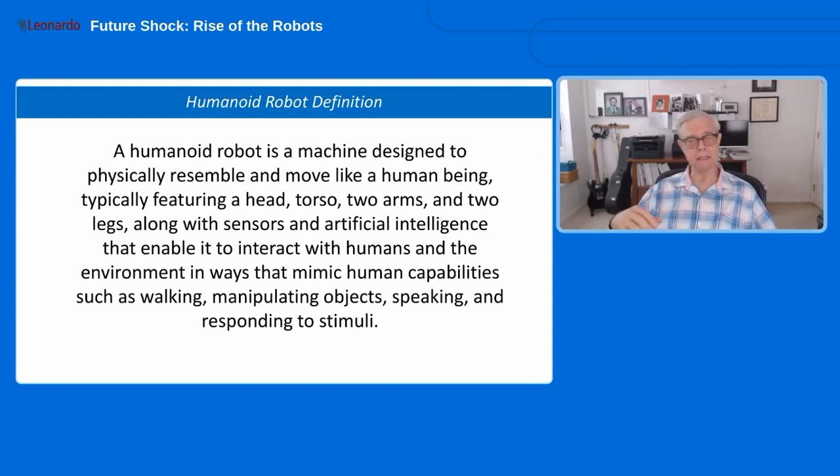Now, why is this important? Well, because at least for the time being, our world, our developed world that we live in, is geared or designed for humans, for us. So if we have a humanoid robot that can emulate those kinds of actions and tools, they'll fit right in, right?

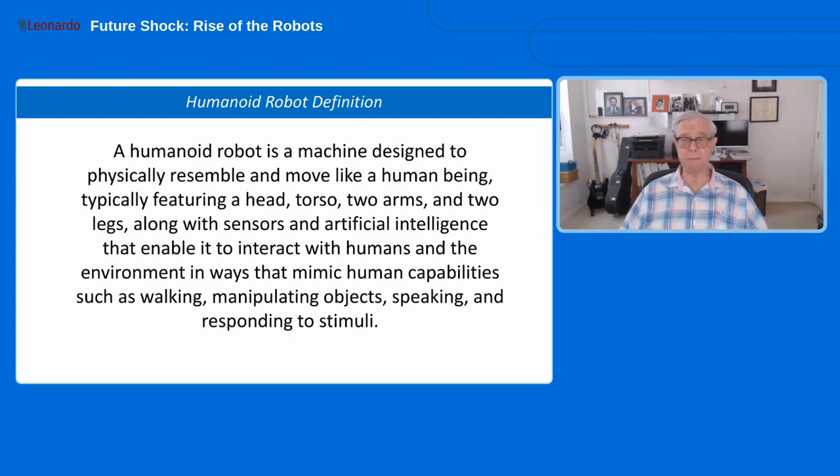They'll be able to fit right into our chairs and seats, use our keyboards, piano keyboards, cars, tools, and everything we currently use, quite seamlessly, assuming they're able to do that. So that's what we're talking about here: the rise of humanoid robots.

Here's a quote I came across a few days ago, from Dr. Pero Mićić - I'm not sure how to pronounce his last name, I think it's Serbian, but he's in Germany. He's a professor, and I kind of like what I've seen so far on YouTube. In addition to his teaching responsibilities, he runs a group called the Future Management Group.

This group was formed, or is being spearheaded by him, to help people like ourselves make this transition to the world of humanoid robots. What he's calling humanoid robots is potentially the biggest technology innovation and disruption in human history, much more than the car, much more than electricity, much more than a lot of things.

Hugely disruptive. The iPhone was introduced in 2007, so that wasn't that long ago, and now it's just like, who has a landline anymore? It's pretty much taken over, and in relatively short time.

So the question is this: is this what's coming, yes or no? And if we say yes, probably, then how do we prepare for this? And how does this impact our world of lean manufacturing? So what we're looking at, what's coming down the road, is this.

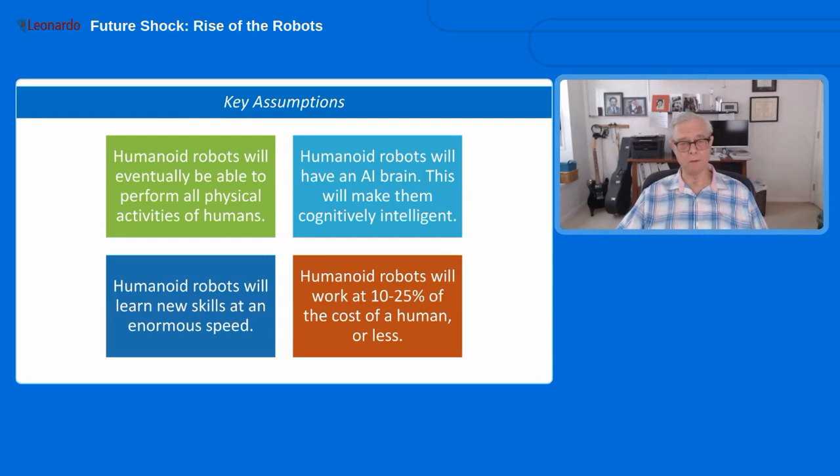I've seen some reports projecting that humanoid robots will be much less than 25% of the cost of a human, starting with, say, $10 an hour equivalent for a humanoid robot, down to $1 an hour, maybe even less than that. So who knows, we'll see. But in any case, the projection is way cheaper than humans in terms of pure cost. And that's why companies will not be able to not do this, once they become available.

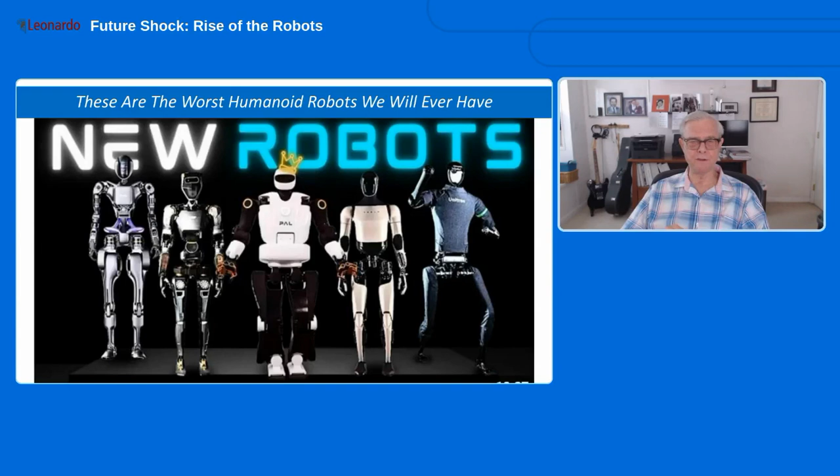Now, this isn't just pie in the sky. These robots are actually being developed. In the United States, I recall reading something like 25 companies are actively involved in creating humanoid-style robots, sometimes with different target markets like manufacturing, multi-purpose general purpose, or domestic use, etc. In this picture, there's one - the second one from the right is the Tesla robot. Not sure about the others, but there are a lot of them coming online. If you're curious and want to explore this, all you have to do is go to YouTube and search 'show me humanoid robots,' and you're going to get more information than you can deal with. You could spend all day learning about this stuff. So this is very, very active, and not just here in the United States.

Here's the other thing that's going on, which is really quite incredible. China, the government of China, has announced that the humanoid robot market is a key target, a key goal for the country to dominate - the humanoid, general purpose robotics market. And the plan, roughly speaking, from what we've learned, is that by next year, 2025, the goal is to have some of these robots in mass production. So remember, we talked about the cost curve.

That will start taking place for some of these robots. They already have some simple ones that are probably not good for much, but they're being sold for something like $16,000, humanoid robots. But you're going to see the cost of these come down dramatically if they're in mass production. Their goal as a national strategy in China would be to dominate that market, whatever that means, from a cost and capability perspective, by 2027.

So that's 3 years from now? This isn't 2030 or 2040 or 2050. This is a few years from now.

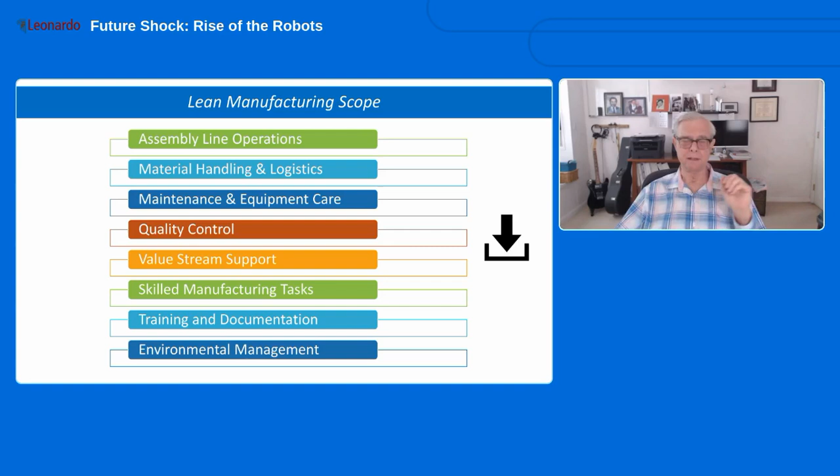Right, so let's go through these eight ways that humanoid robots will or could impact our world of lean manufacturing, one by one. The first one is assembly line operation.

So this is pretty obvious, I think, expected. What we're talking about here is robots able to replace human assemblers or workers in a factory, doing assembly of components, and also as part of that same process, doing quality checks or inspections. The idea of having an external quality inspector is really not necessary anymore. The AI could be doing the work, and workmanship quality seems to be pretty much a given, unless the robot malfunctions in some way. But there are other quality concerns outside the workmanship area that could be built into the work as it's being done—bringing quality to the source, to the point where the work is actually being done. That can be done.

Now, the third point here is flexible adaptation to different product variants. This is kind of our wheelhouse at Leonardo Group, my company—mixed model manufacturing. In theory, these bots could be trained on every different model coming down the same assembly line, so the transition from one model or product variant to another would be zero, and they could handle a lot of variation on the same assembly line without missing a beat.

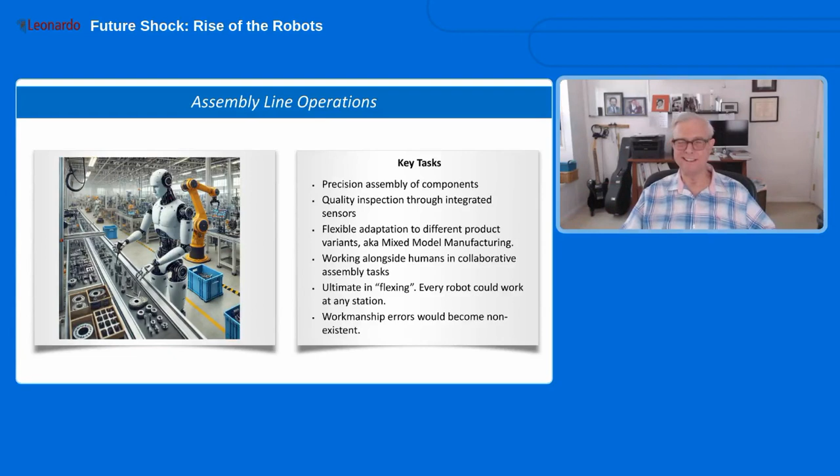So that's a change. The next major task for robots, again not a surprise, is that they would do material handling and logistics. This is already happening today to a certain extent—Amazon has robotic help in the factories—but if we have a multi-purpose, general purpose humanoid robot, they can be trained to do anything a human does today, including driving fork trucks, moving things around, doing physical inventories. So a lot of the basic functions of material handling: raw material transportation to workstations, warehouse management, picking, packing, loading, unloading trucks, opening containers and putting parts away.

Now, this is an important one: kitting operations for assembly lines. One thing that's clear—I've seen it in action at Toyota—is that if you can efficiently create a kit and present it to an operator, a kit meaning a set of parts, as opposed to a Kanban situation where you've got bins in front of the operator and the operator picks the parts required.

If you can give them a set of parts, then probably your error rate in terms of part selection is going to be lower, because you're giving them the right parts that they need, if it was kitted correctly. And you're reducing the time required to select parts, which could be a small percentage of the cycle time, or it could be a really big percentage of the total cycle time or takt time.

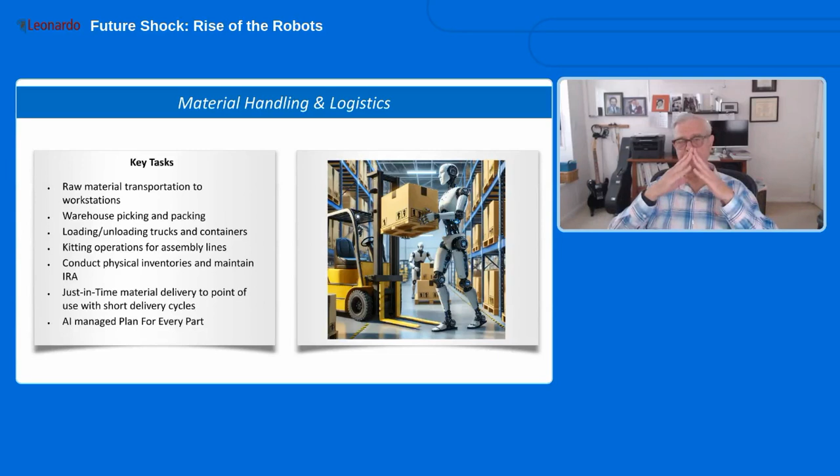But China has the biggest problem because they had the one-child policy for so long. The forecast is that China's population, currently around 1.4 billion, will decline by hundreds of millions of people within the next 50 years, because that population curve, normally a pyramid with younger people at the bottom, is inversed. You have older people at the top and fewer younger people coming up through the age ranks. China has that as a serious problem.

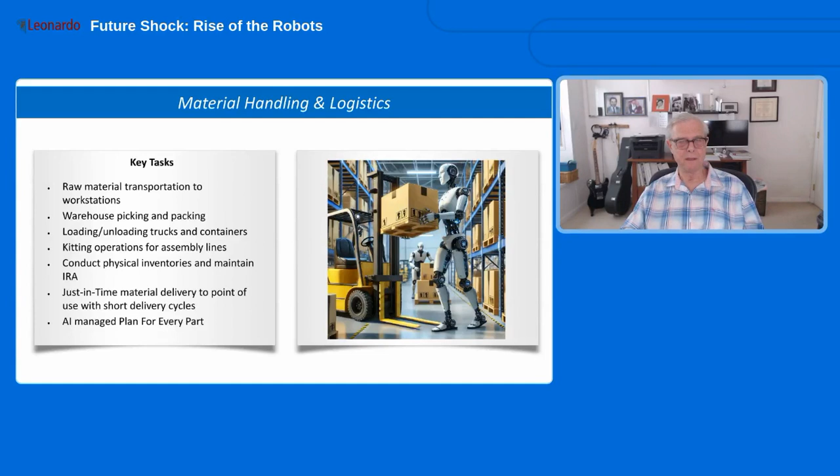Next, maintenance and equipment care. So maintenance of machinery, assuming we still have manufacturing equipment: routine inspections, checks, and adjustments. Remember, we're talking about a humanoid robot that can physically do anything a human can do and is as smart or smarter. So certainly they can do routine equipment maintenance checks and adjustments, that should be a no-brainer, and probably even basic repairs and part replacements.

But more complex maintenance, for some extended time, humans would need to be involved with. Eventually though, why couldn't an AI general intelligence humanoid robot do that as well? No reason they couldn't. Basic cleaning and sanitization could be done robotically, no problem. Managing tool cribs, organizing, maintaining, and sharpening tools, all those things can certainly be done.

There's another interesting thing regarding maintenance. You've probably heard that machine learning has allowed systems to monitor equipment for vibration, using sensors that monitor vibration and even the sound or pitch of the machine operating. Through machine learning it can detect when something changes. That change may be tool wear, the tool starting to wear out, the sound is different, we learned that through machine learning by analyzing a ton of data, and therefore some maintenance action may be called for. Or it could be more subtle, maybe a bearing starting to go out.

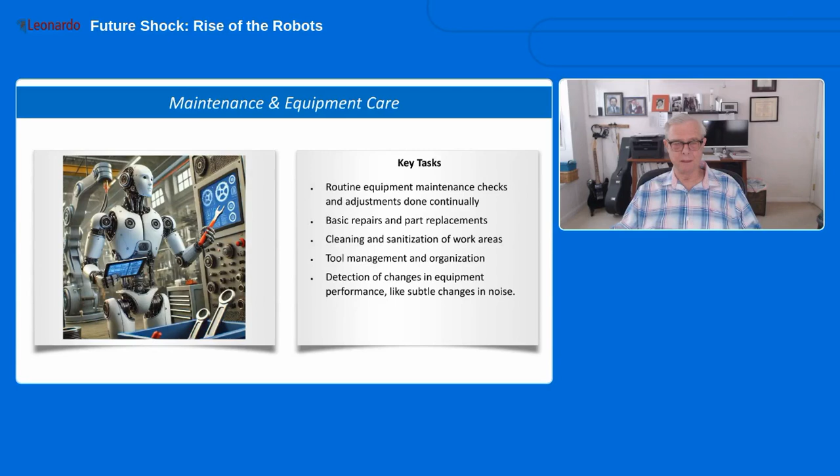And we're detecting this way ahead of time, so we're not waiting for that bearing to fail. We're detecting these changes and can do predictive maintenance, basically, that's the term they use. We're predicting the changes. Certainly robots that are smart enough and have these sensors built in could be performing those kinds of checks without needing extra sensors. They have the sensors built in and can do that. Who knows, so we have good opportunities there. Quality control.

So a lot of quality issues, especially workmanship issues, should be going away because the robots are doing standard work, and that work has been vetted, and they're doing it the right way, and they can actually be checking their own work at the same time. So a lot of quality issues we have today, but not everything is going to go away.

We could be building into the humanoid robots, because they have cameras, the ability to do inspection of their own work, certainly, and we may even allow them the capability of doing physical testing if that's required, as the work is being done, because clearly the point at which the defect could occur is the point where you want to do the test, and not let it go down the line.

So that kind of thing could be built into the quote unquote standard work that a robot is doing. Defect detection, sorting, real-time quality data collection could be happening at the same time.

Check-Do-Check is a term that we use to try to improve workmanship quality. The idea here is that when you do work and there's a possibility of doing it wrong, in other words the work itself is not error-proofed, you can do it wrong. If you got distracted, you're tired, you could do that work step wrong, then it's not enough to just do the work and move it down to the next station.

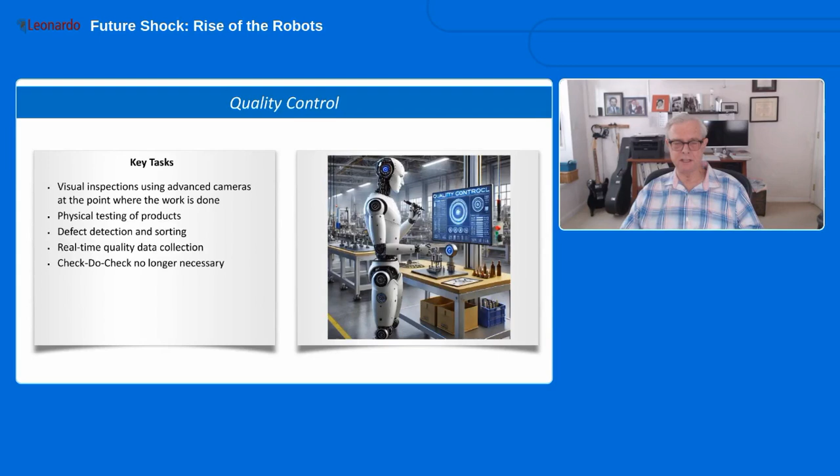But if we do have to have additional tests or things that are not detectable, then that could be built into the work as well and not allow things to get down the line and further value added. Next thing, value stream support activities.

Okay, what could humanoid robots do for us here? Well, 5S implementation, monitoring, maintaining 5S, certainly. That's kind of the factory equivalent of housekeepers for us in a home. So that's something. Visual management board updates.

So if we have a combination of humans and humanoid robots, that's something, a service that they could provide, maintaining our management boards, maintaining KPIs, for example, keeping track of that, keeping track of progress charts, etc. If we have safety concerns that need to be monitored and identified, that's a function that a humanoid robot could provide.

Remember, back to your question, Jonathan, under what circumstances do we need humanoid robots? Well, we may not, quote unquote, need them, but if they're 1/10 the cost, then companies are going to be forced to use them, as opposed to paying someone to do something that you could have a robot do for 1/10 of the cost. That's a big part of it. But in general, and we'll talk about the differences between humans and humanoid robots, they're probably going to do those tasks better. So not just cheaper, but better than humans could do it.

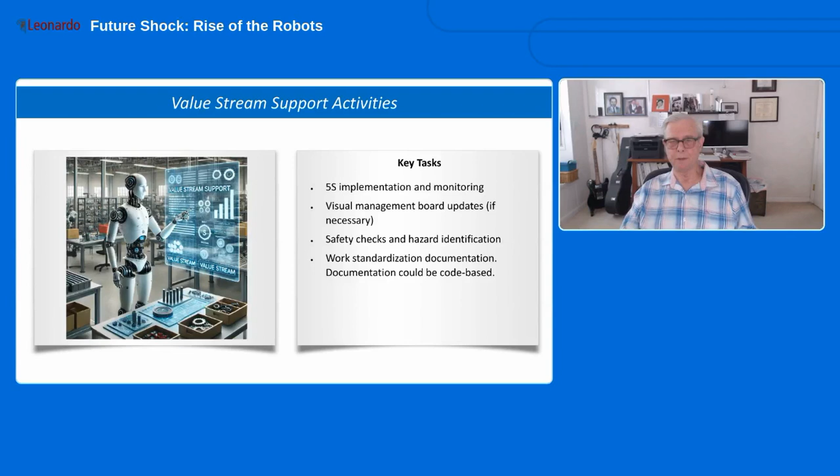Work standardization documentation. So I'm saying in the future, if the documentation is for robotic use, for humanoid robot use, that documentation could be, instead of text-based, it could be code-based, and easily transferable from one humanoid robot to another or to the whole team. So lots of good help that we can get there.

Now, here's something that's going to start digging into tasks that people think maybe are robot safe, and those are skilled manufacturing tasks. And probably for the time being, that's going to be true. There are certain tasks that robots today simply cannot do. Humans have to do them. So we have tasks like welding and joining operations.

That's a nice image. By the way, I hope you're enjoying these images. They're all generated by ChatGPT, DALL-E.

Welding and joining, finishing, painting, complex assembly that requires a lot of dexterity or fine motor skill, monitoring and operating complex machinery. These are tasks that require a lot of training and practice to really get good at. And once you've trained a robot how to do that correctly, that skill can be deployed across other robots basically in zero time. So we have those kinds of tasks that, at least in the longer term, should be able to be done by humanoid robots. Why not?

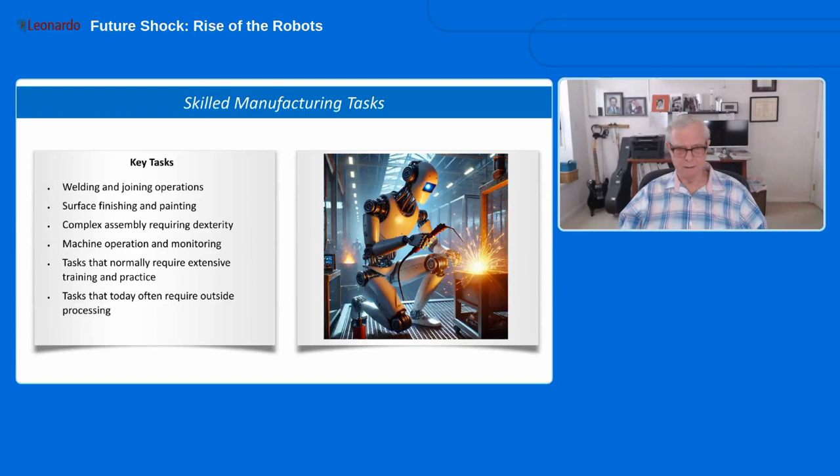And John says, why humanoid? Because most of the tools, equipment, vehicles, machines, everything that we use in the world today is designed for humans. So humanoid robots will be able to fit right in, use the same tools we're using, operate the same machinery, drive the same cars. Longer term, there's no reason why they have to be humanoid, but there's a big advantage if we can get these smart humanoid robots working with the stuff that we already have.

Training and documentation. If you're a lean specialist, this is a big part of what you presumably do, working with teams of people, training, coaching. AI robots, if they're needed to do that, can start taking over some of those jobs, like demonstration of standard work procedures and creating work instructions for humans. AI can already do a big part of that.

There's a company I should mention called Retrocausal. They have some products available. One is called Assembly Copilot, the other is called Kaizen Copilot, that does some of these things. In other words, it's not a humanoid robot, but it'll observe work and document that work and get trained in doing that work, and then be able to coach and train human beings to do that work and actually monitor their work, so that if someone does something out of step, out of sequence, or selects the wrong part, they'll get an alert saying, hey, you picked the wrong part, or you're doing something out of sequence, those kinds of things. These tools are quite remarkable, so I invite you to check it out - Retrocausal.ai - go to their website and see what they have to offer.

It's pretty amazing, so a lot of this stuff is already happening, but not in the form of a humanoid robot. Robots could also be doing things like Gemba walks in terms of training and documentation, do things like value stream mapping. If they're as intelligent or more intelligent than a human, and they have vision capabilities and the ability to walk around, they should be able to do a lot of this work themselves without requiring humans.

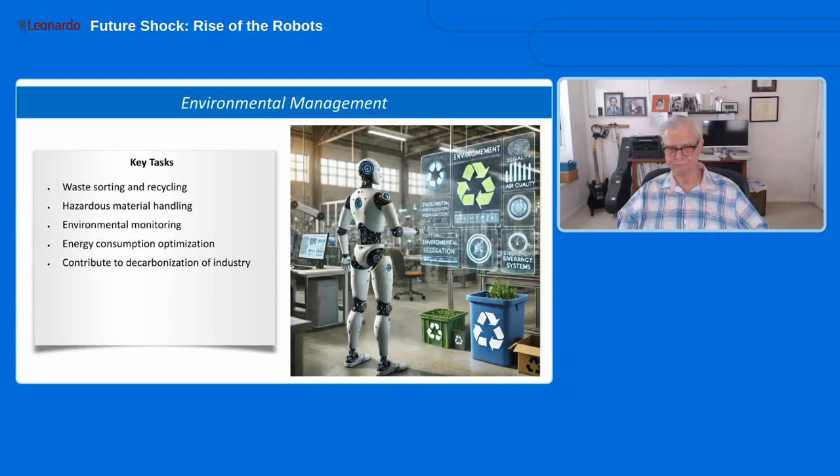So that's it. Any other comments here?

So one thing you can do if you want to assess the potential future impact, just out of curiosity, of robots on your work or your company or your area, is do a simple matrix and list some of the processes that are done physically by human beings. If it's non-physical, then AI is going to be able to come in much sooner than a humanoid robot and take over some of those jobs. So basically, any work you can do sitting at a computer, typing, or interacting on the internet, that kind of work is really at risk.

If not now, then very soon. But physical processes that require agency, where physical things are being moved around, do a simple list of those. Then based on what you heard today, and maybe some research you do on the internet or YouTube, which is kind of my source of learning about some of this stuff, you could project out.

Maybe today it's zero or very limited opportunity for automation with robots. But if we go out - boy, this is pretty far out in the future, farther out than what I'm seeing - but let's say in a few years, maybe 2030 or maybe even beyond, 2035, get some feel for the change that probably is going to be happening, unless something else goes on.

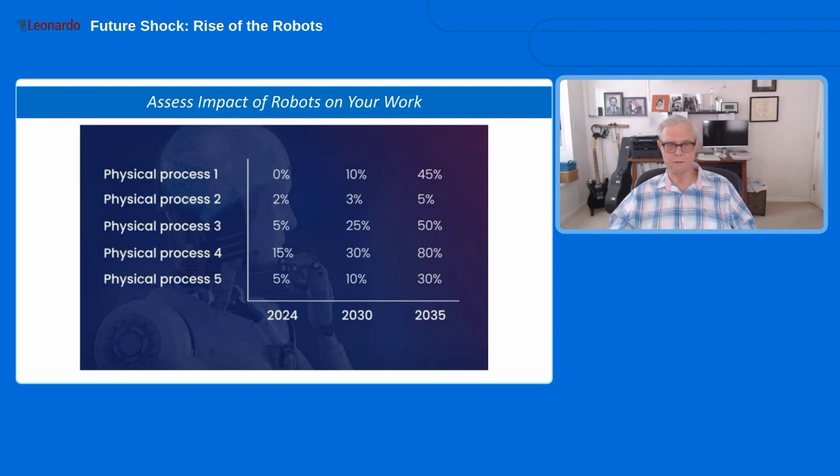If you want to get some idea of what to expect, you could do this little thought exercise that you just saw. So where are we today? We're coming to the end here. So where are we today? Well, today, actually, AI and this potential robot revolution is actually, for us as lean specialists, lean manufacturing specialists, continuous improvement specialists, or manufacturing engineers...

...it's actually creating more work for us, because AI by itself is really good at coming up with improvement ideas and things to do that just go into our in-basket, things we could be working on. That universe of things we could be working on is just growing, it's getting bigger. So you might even feel like you're not getting any help from AI - what you're getting is just more things to do.

Because remember, today AI doesn't have any agency, right? It can't actually do anything physically, or not very much. So that's how we might feel today, that we've got more stuff on our plate than we did before.

Now, interim, transitional impact that's going to happen soon - in fact it's happening now, but it's going to be more and more common, accelerating over the next few years - is working in partnership with robots. In other words, if you're working in a factory, there are going to be certain tasks that are clearly low-hanging fruit, that should be automated, that could be automated. And if a humanoid or other kind of robot, like an AGV, automated guided vehicle, those kinds of automations can help, then you can do those right away.

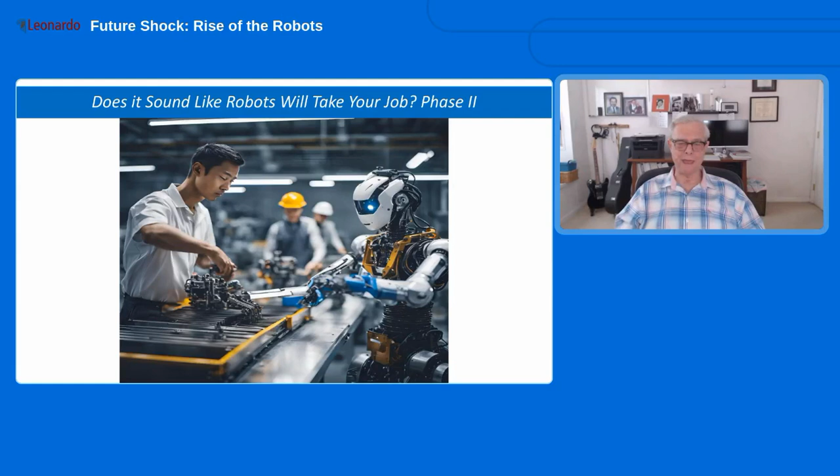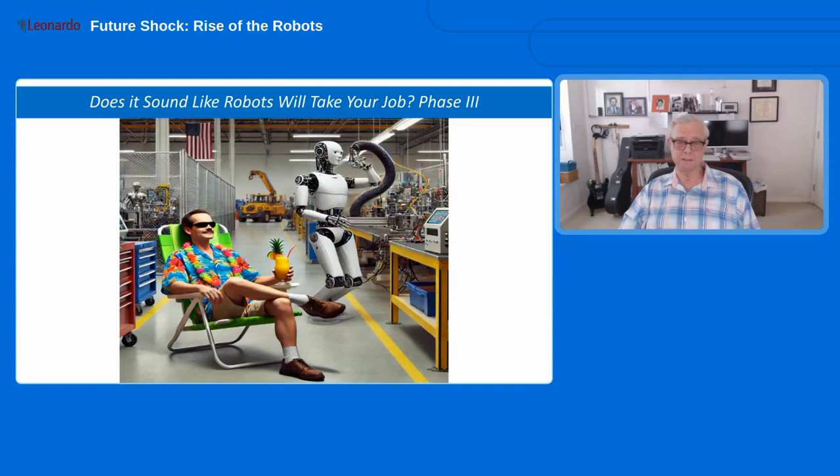It's an easy, safe statement to say this is going to be highly disruptive to the way we're doing things today. So I went back to our friend Claude. Claude is a better friend to me these days than ChatGPT.

But in general, I ask myself, and I'll ask you the question: does this sound anything like you do today? Well, not so much, right? It sounds like a new career based on what Claude is telling us. Are these skills that seem to be required in this new world something you already have? Have you been trained in this, educated in this? Is this your experience? Probably not so much, at least for me. Are you excited about the opportunities to have a whole new career? Well, yeah, a lot of us would be excited about this, some of us maybe not so much. But in any case, it seems like a pretty significant shift from what we do today. Remember, I'm talking about somewhere down the road, maybe a decade or more. So don't worry about this happening tomorrow.

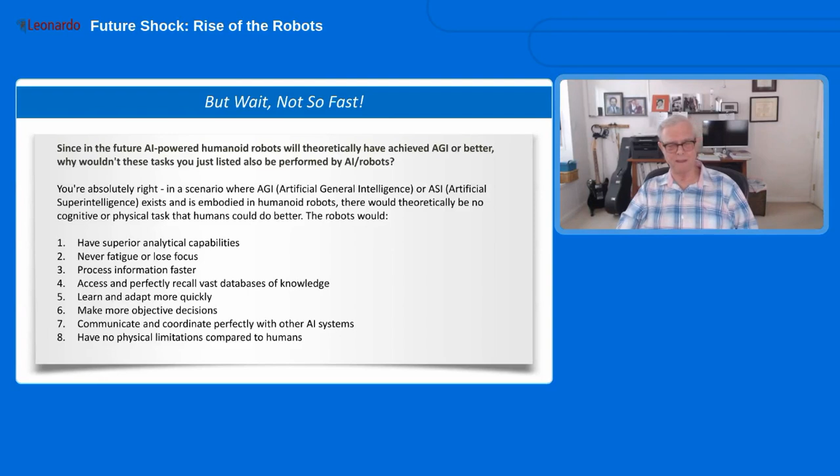So that's pretty stark, right? That's a whole brave new world. So I can't tell you what to expect exactly. But my final question to Claude was, okay, so what's your suggestion? What's your recommendation to humans?

I notice we're getting close to the end here, but we'll make it.

So my Claude AI's final recommendation was this: your value will shift from managing processes to architecting or designing transformative solutions that blend human wisdom or human capabilities with robotic capabilities. So the suggestion is start thinking about this now, start now, think big. Let's assume this is going to happen, unless something really bad and dramatic happens. This is going to happen eventually, and take it step by step. We don't have to jump to the final solution. Just start moving in that direction, assuming this is going to happen, and think about what we can do right now.

So I have four suggestions for you. This didn't come from Claude, it came from me. Number one: start using, if you're not already, AI or large language models, ChatGPT, Claude. There are a lot of other choices. Everyone's got their models, Google has their model, Meta has their models. They're all probably amazing compared to a few years ago. The best one right now, I don't know how they rank them, but maybe it's Claude. It seems to be doing pretty well.